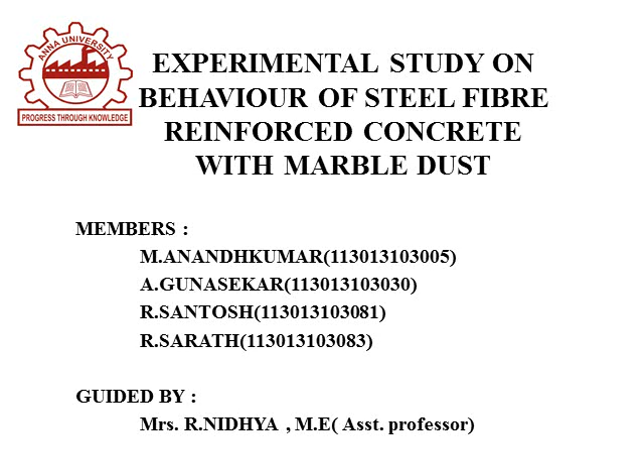Experimental study on behavior of steel fiber reinforced concrete with marble dust, done by M. Anandhkumar, A. Gunasekar, R. Santosh, R. Sarath, and guided by Mrs. R. Nidhya. Aim: to study the properties of steel fiber reinforced concrete with marble dust and to compare its properties with the conventional SFRC concrete.

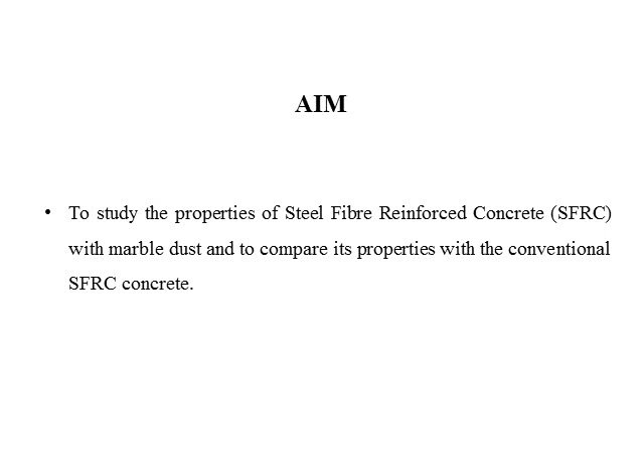Objectives. The major objectives of this project are to increase the strength of the concrete, to resolve the environmental problems caused by large-scale depletion of natural resources, to reduce the dumping of waste materials, and to utilize them in concrete.

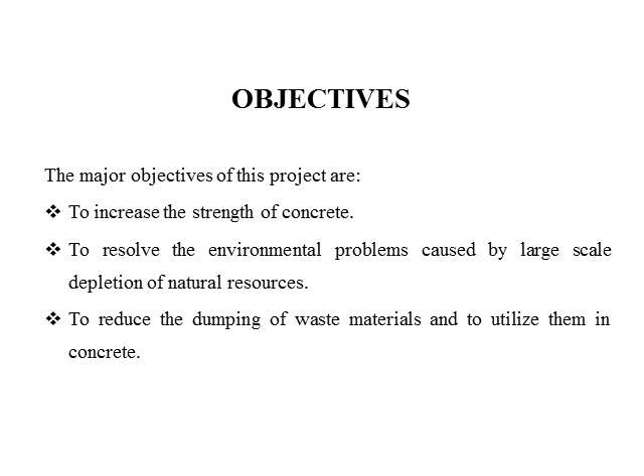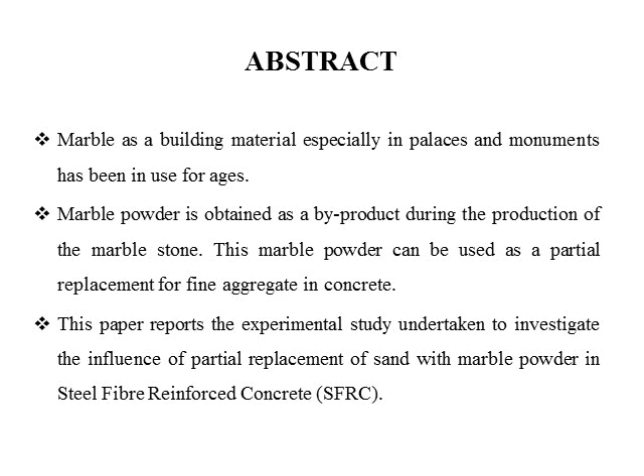Abstract. Marble as a building material, especially in palaces and monuments, has been in use for ages. Marble powder is obtained as a byproduct during the production of the marble stone. This marble powder can be used as a partial replacement for fine aggregate in concrete. This paper reports the experimental study undertaken to investigate the influence of partial replacement of sand with marble powder in steel fiber reinforced concrete.

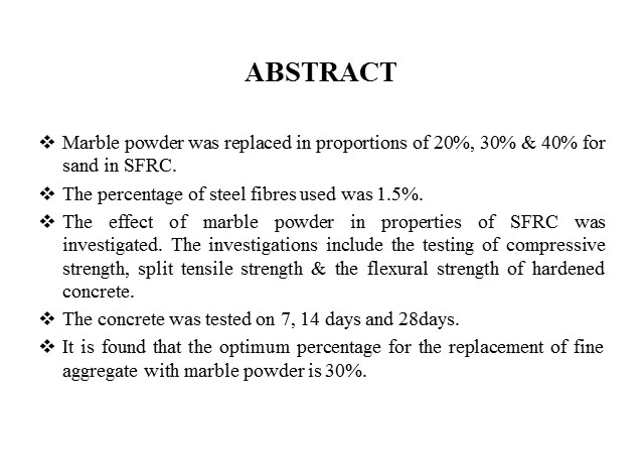Marble powder was replaced in proportions of 20%, 30% and 40% for sand in SFRC. The percentage of steel fibers used was 1.5%. The effect of marble powder on properties of SFRC was investigated. The investigations include testing of compressive strength, tensile strength and flexural strength of hardened concrete. The concrete was tested on 7, 14 and 28 days. It is found that the optimum percentage for replacement of fine aggregate with marble powder is 30%.

Literature review. The work by Mr. Nikhil A. Gadge, Professor S.S. Vidhale, of Professor Ram Meghe Institute, on fiber reinforced concrete using slag and steel fiber concludes that the optimum dosage for partial replacement of cement by ground granulated blast furnace slag is 20%. The optimum dosage for addition of steel fiber is 1.5%.

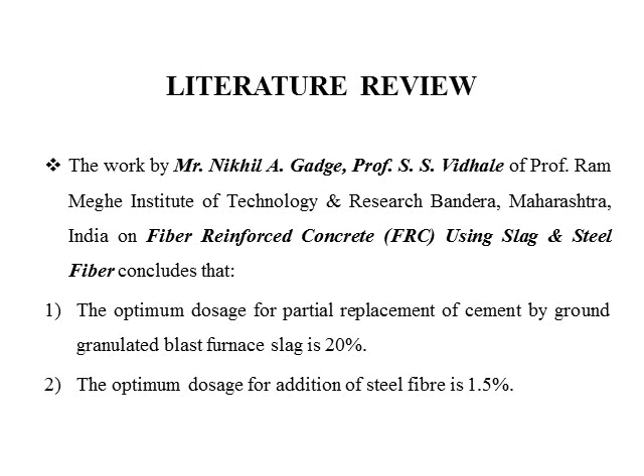Experimental study on steel fiber reinforced concrete for M40 grade concludes that the compressive strength, split tensile strength and flexural strength are on the higher side for 2% fibers compared to 0%, 1% and 3% fibers. The compressive strength increases from 11 to 24% with addition of steel fibers. The flexural strength increases from 12 to 49%. The split tensile strength increases from 3 to 41%.

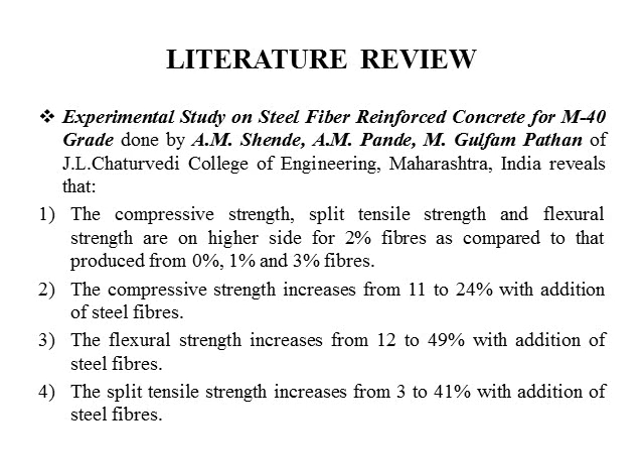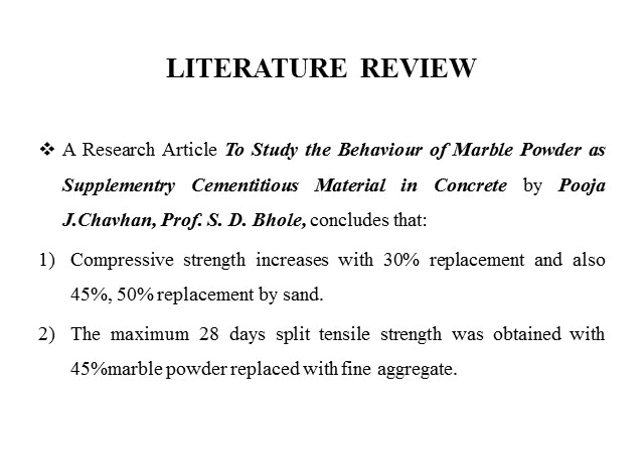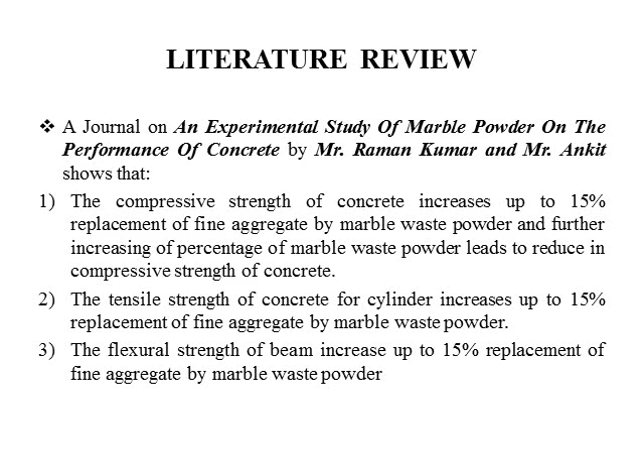A study on the behavior of marble powder as supplementary cementitious material in concrete concludes that compressive strength increases with 30% replacement, and also at 45% and 50% replacement by sand. Another journal on an experimental study of marble powder on the performance of concrete found the compressive strength of concrete increases up to 15% replacement of fine aggregate. The tensile strength of concrete cylinders increases up to 15% replacement of fine aggregate. The flexural strength of beams increases up to 15% replacement of fine aggregate with marble waste powder.

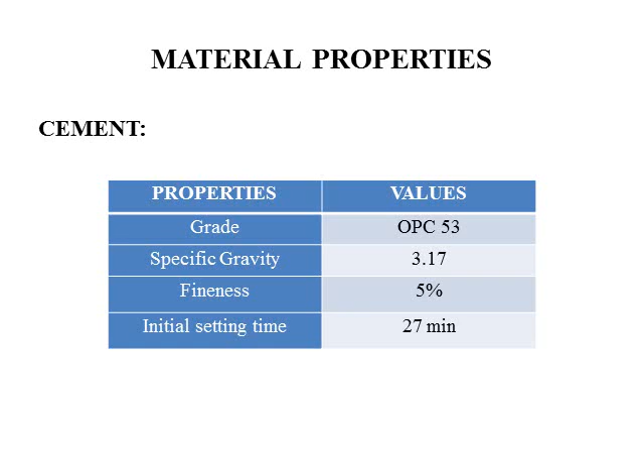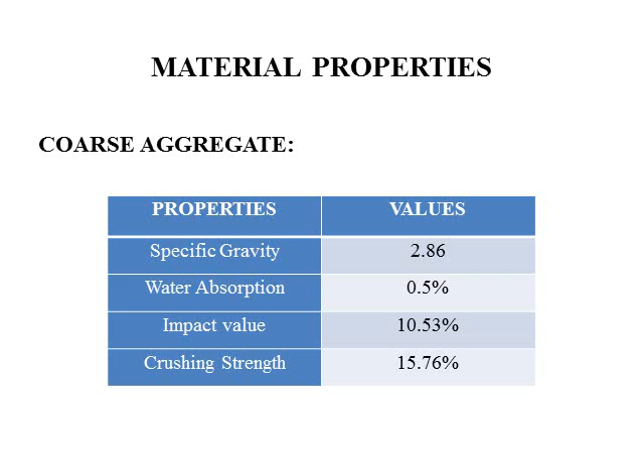Material properties. The properties of the materials used in our mix are shown. Cement: grade OPC 53, specific gravity 3.17, fineness 5%, initial setting time 27 minutes. Fine aggregate: specific gravity 2.53, fineness modulus 3.56, belongs to zone 2. Coarse aggregate: specific gravity 2.86, water absorption 0.5%, impact value 10.53%, crushing value 15.76%.

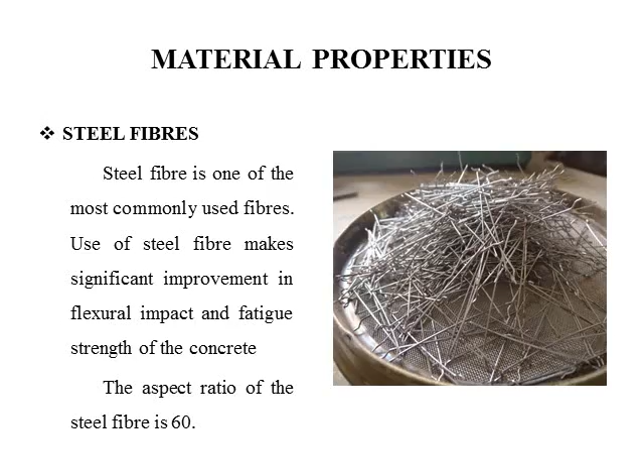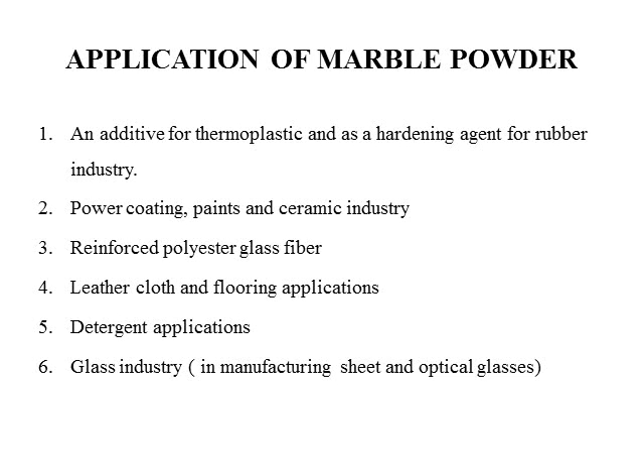A journal on an experimental study of marble powder on the performance of concrete discusses the compressive strength of concrete. Marble powder: the marble powder used is of white color and possesses specific gravity of 2.67. Applications of marble powder include powder coating, paints and ceramic industry, leather, cloth and flooring applications, detergent applications, glass industry, etc.

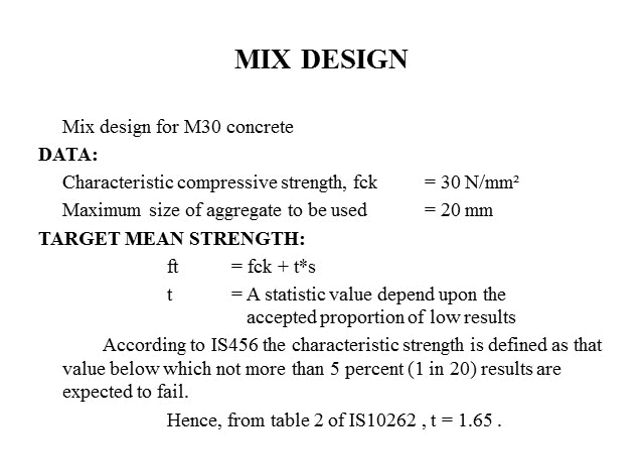Mix design. We have done the mix design according to IS 10262 for M30 concrete, with maximum aggregate size of 20 mm. The target mean strength obtained is 38.25 N/mm square and the water-cement ratio from the graph is 0.42.

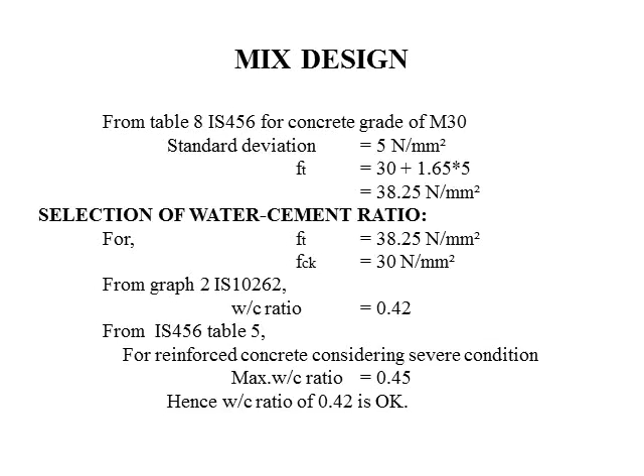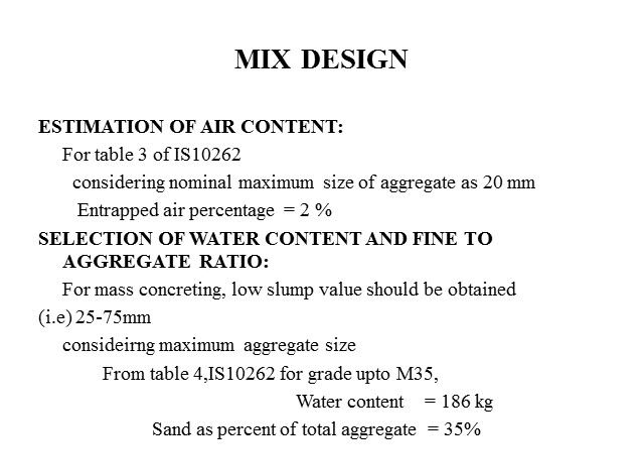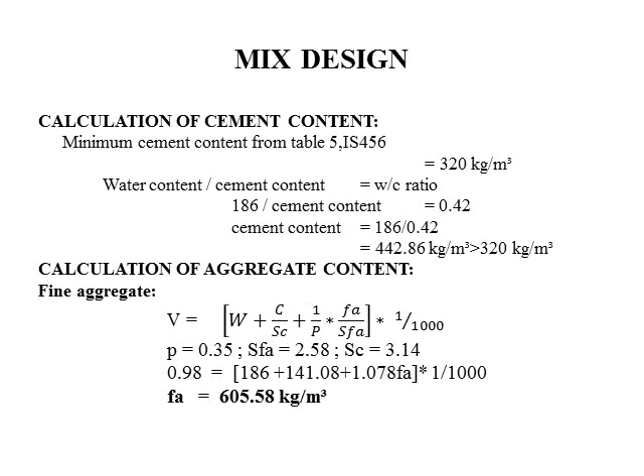Calculation of water content and cement content: the water content is found to be 186 kg for maximum aggregate size of 20 mm, and the sand percentage of total aggregate is 35%. The cement content is calculated to be 443 kg per cubic meter. The volume of fine aggregate was found to be 605 kg per cubic meter and coarse aggregate 1145 kg per cubic meter. The ratio was found to be 1:1.37:2.59 with a water-cement ratio of 0.42.

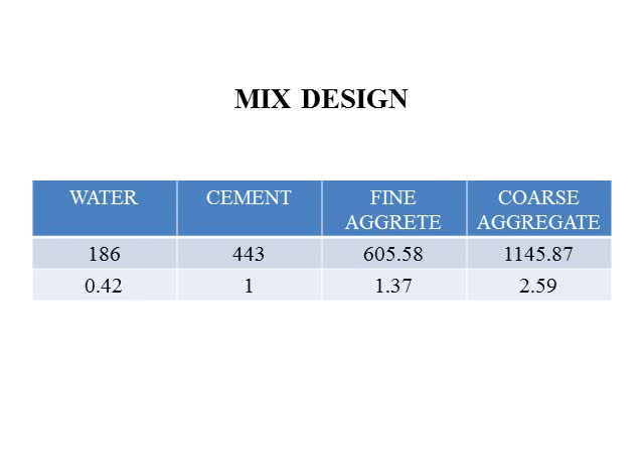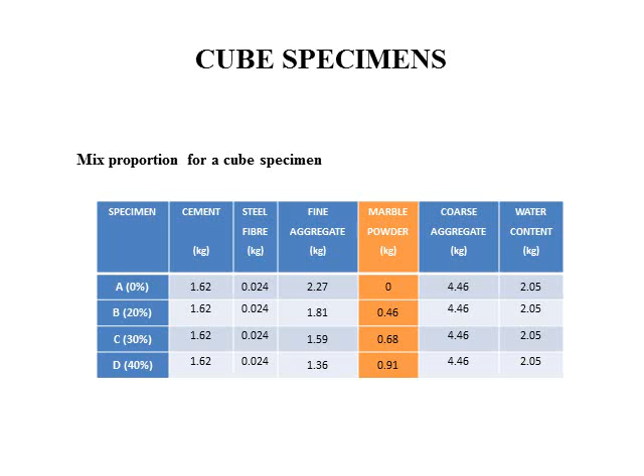The specimens are cast for 7, 14 and 28 day testing of cubes, and the mix proportions per cubic meter are shown, along with proportions for a single cube, cylinder and beam specimen. Testing: the concrete was cast and cubes were tested on 7, 14 and 28 days, while the cylinder and beam were tested at 28 days.

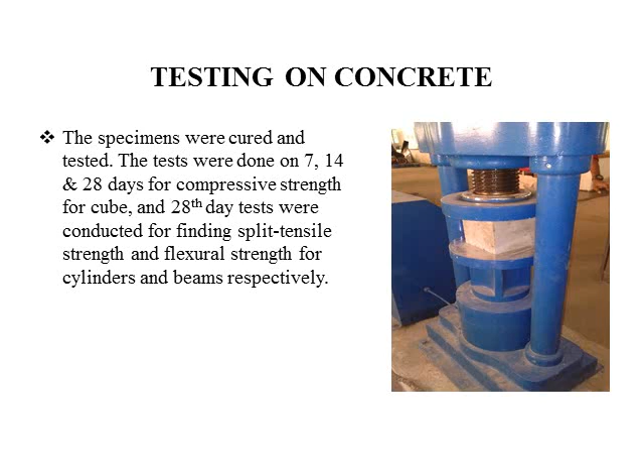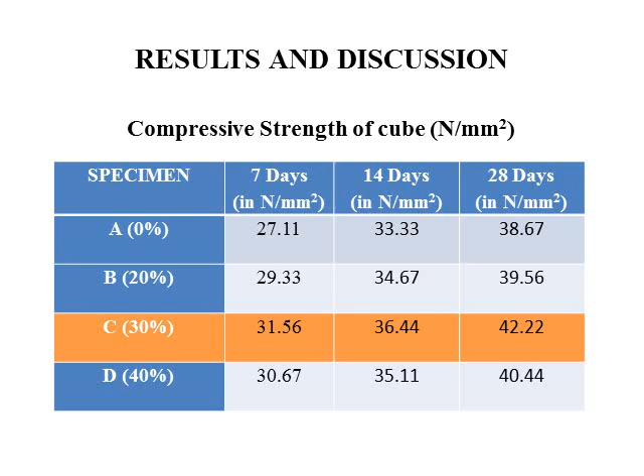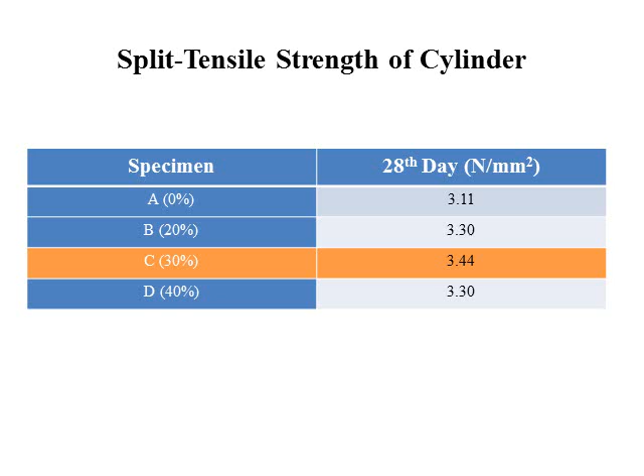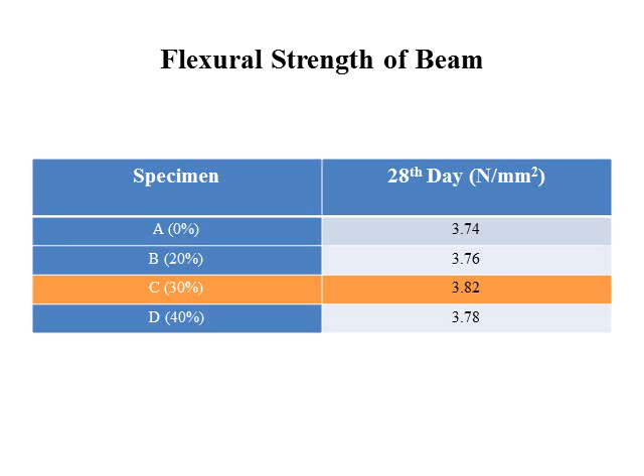Conclusion. Based on the 7, 14 and 28 day test results, the following conclusions were made: partial replacement of fine aggregate by marble powder increases the strength of SFRC concrete mix. The optimum replacement of fine aggregate by marble powder was found to be 30%. At 30% replacement, the compressive strength of concrete increased by 9% compared to conventional steel fiber reinforced concrete. The split tensile strength increased by 10%, and the flexural strength increased by 2%.